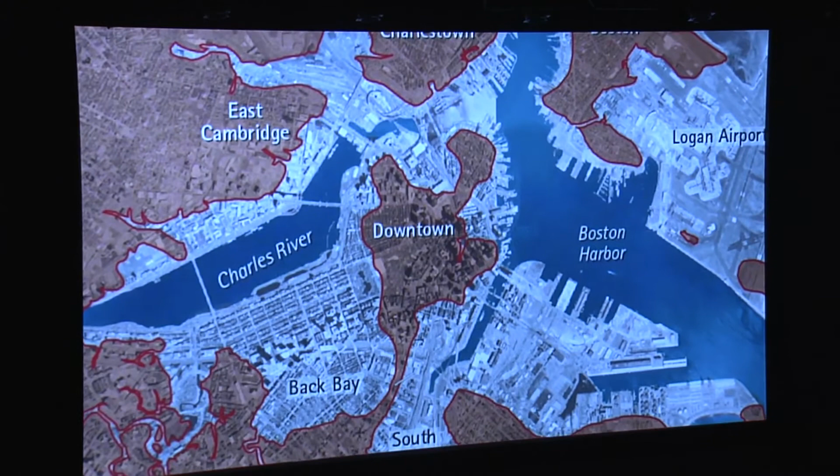The city of Boston, back in colonial times around 1630 to 1650, was basically a peninsula as it is today, but much smaller. Eventually it started to burst at the seams, and there was a need to create land. So they filled in Back Bay, Fenway, and South End over a period of about 30 years. They also filled in areas of the North End, the majority of East Boston, and Fort Point Channel. There were probably six major fillings that occurred that created what Boston is today.

After that, they had land to build on. In the period of the late 1800s to early 1900s, buildings on filled land were supported on wooden pilings. Not every building in Boston on wood piles has the tops of the piles at the same elevation, and at an elevation that is below groundwater.

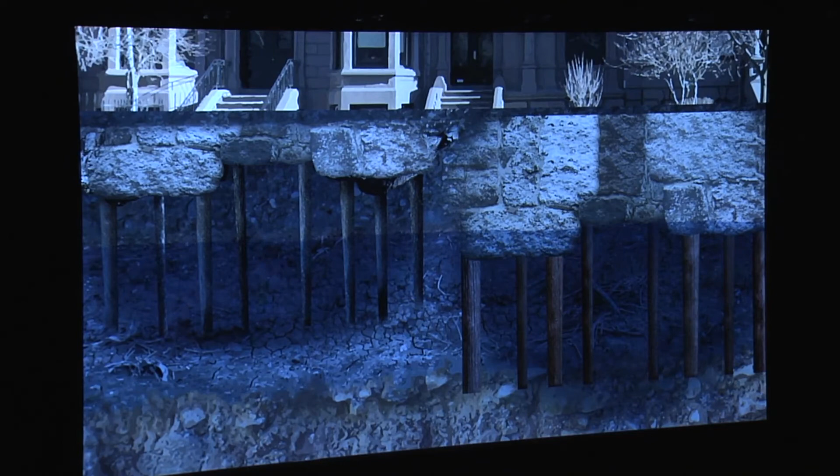As time has gone on and Boston has become more developed, there's been less ability to replenish the ground with groundwater because it's just a much more impervious boundary. As soon as the water table drops and stays down for a certain period of time, that wood becomes exposed to oxygen. The oxygen creates an environment for bacteria and bugs to grow, and when those bugs grow, they attack the wood and eat it, and that's how they survive.

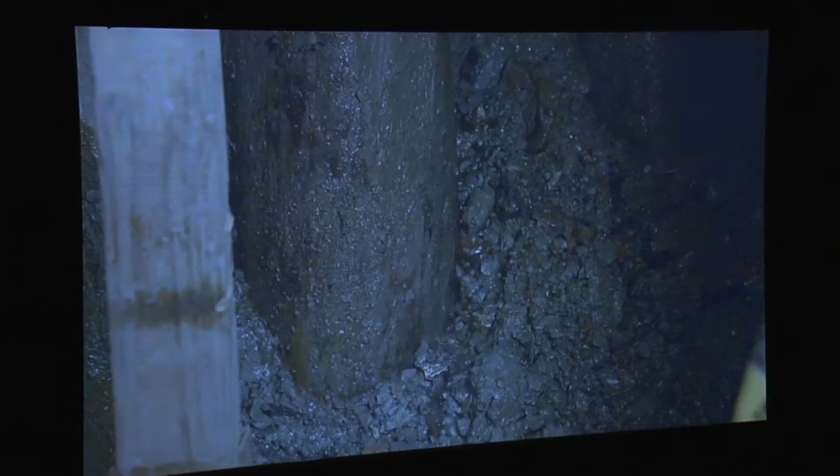So what happens is you go from, say, a tree or a wood pile that might be 10 or 12 inches in diameter, holding up granite blocks, which are then holding up brick walls, down to about 2 or 3 inches, or in some cases it completely deteriorates. The support of those blocks in the wall is lost, and the ground, which is filled land and wasn't good ground to begin with, causes the buildings to settle.

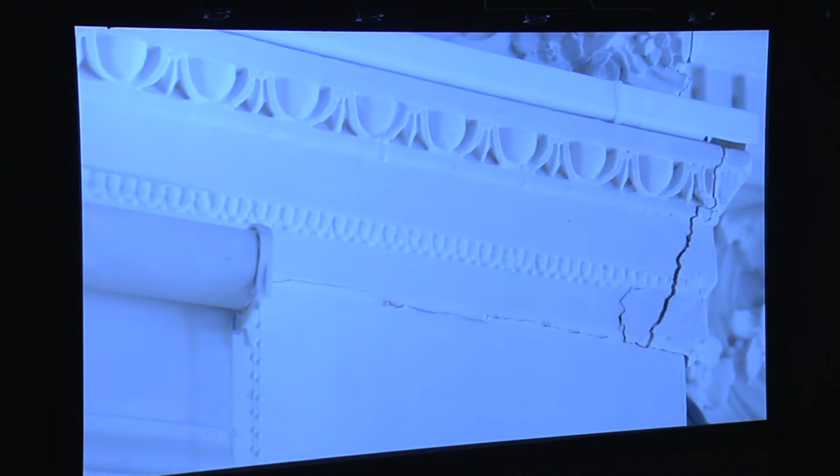What usually happens is none of the piles deteriorate at the same time, so you get different conditions at the front of a building versus the back. Instead of the building settling evenly, one part settles and the other doesn't. When that happens, the brick cracks, or your nicely finished walls crack, or you can't open doors and windows, or you just have problems with the house itself.

And so that's the problem, that's what we're trying to identify. And if we do identify it, then we try to repair that problem. The city, and ultimately the residents, look to us as a resource. We're the information guys, so to speak.

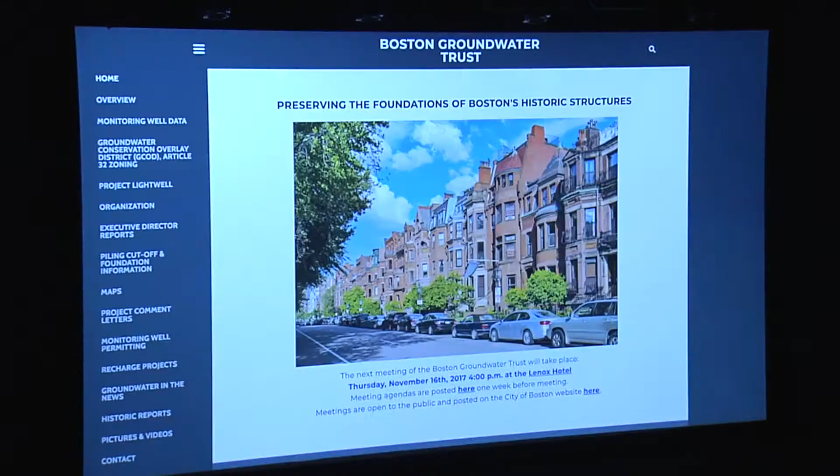People want to know where the groundwater levels are, foundation information, piling cutoff information. We have that. Our primary purpose is to record and report on the groundwater levels, make recommendations to solve the problems, and inform people, let the people know of this issue, why it's important to maintain groundwater levels, that these buildings are in fact on wood pilings, because the first thing you would think of a building is concrete or steel.

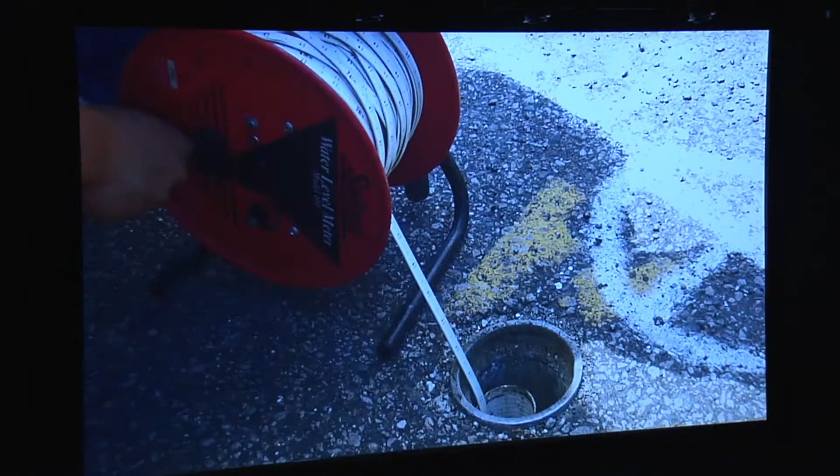We monitor groundwater levels through a series of groundwater observation wells that are in the public way. There are roughly 800 observation wells spread throughout all the areas of the city where there are wood piling supported structures. Every 5 to 6 weeks we read all 800 wells, starting in East Boston and finishing up in the southern portion of Back Bay. Once we finish there, we go right back to the beginning and start all over again. It's a process that usually happens about 7 to 8 times a year, reading the whole well network.

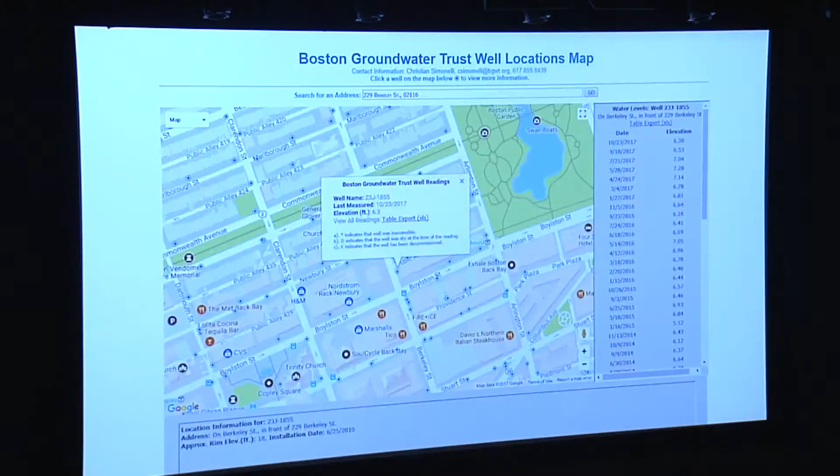If someone calls us to say, I have a building here, is it at risk, we look at our groundwater elevation data, we'll look at our pile cutoff elevation data, which gives us the height of the pilings, and then we'll make a recommendation off that, whether or not they should seek out additional assistance. Ultimately, at that point it would lead to contacting a geotechnical engineer or structural engineer to come out. They'll take a look at the building and give a more professional assessment and advise on what to do from there.

If the Groundwater Trust didn't exist and this well network wasn't established, you'd be putting thousands of buildings at risk.

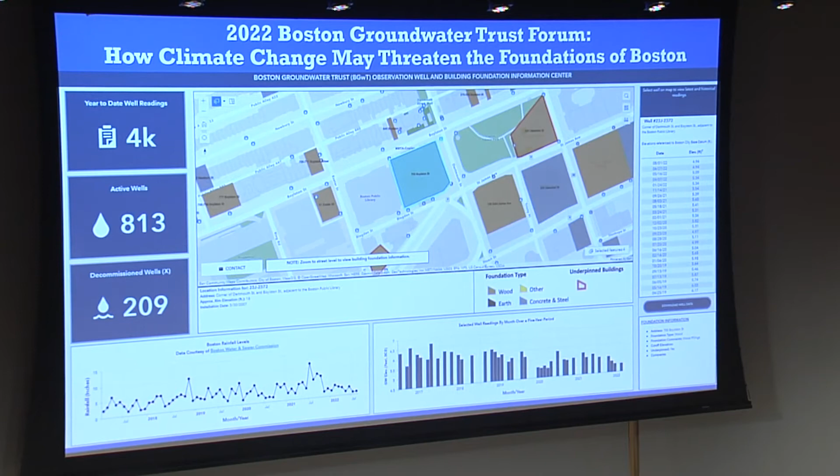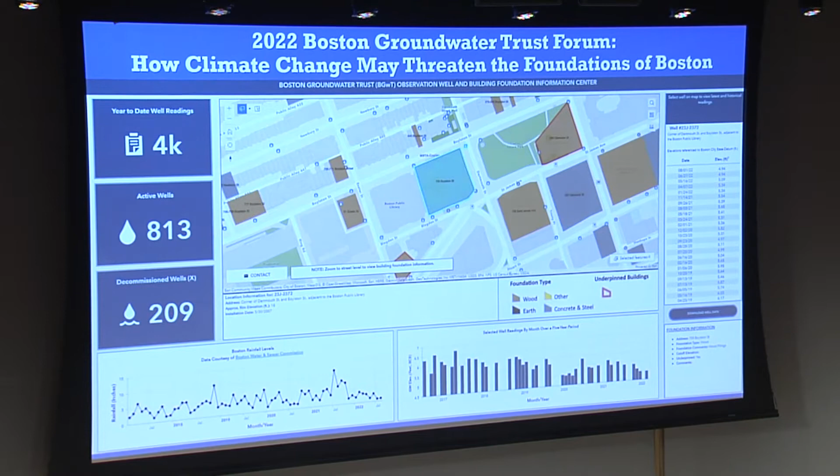We recently updated our website to not only include the observation well data that we have, but also include the building foundation data that we have in one place. We had them in 2 separate spots on the website, but now when a resident calls me or an engineer calls me, we walk through the map, and this is where the groundwater levels are in this particular area. This is what we have for building information, whether or not the building is in fact on wood, whether it's on concrete, whether it's even stated that it's on earth, whether or not it's been underpinned.

Obviously we're adding to this on a daily basis with the readings, and we try to get new data every week on the buildings as much as we can, not only scouring the building inspector reports and the original building permits, but also, anytime we have an engineering firm or a client that says, hey, we're taking a look at our foundation, would you like a copy of the test report? We say yes, and we put that information up on our website.

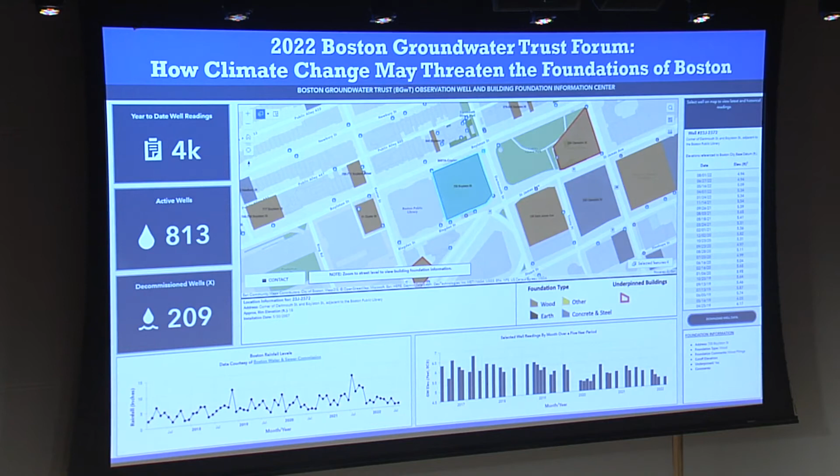Moving forward, we'd like to automate a bunch of observation wells with remote sensing devices. We currently have 5 units deployed that are working, taking continuous readings since March. They seem to be working pretty well. We'd like to keep them in place for about a year before deciding on purchasing additional units, but having these units in place would really allow us to learn about trouble spots sooner rather than manually going out and reading the wells, which we'll always do.

In between the 5 to 6 week period when we're not reading the wells, we can have devices in place that can tell us what's really happening. It's significant because we can tailor the time the water levels are measured, changing the frequency from every 5 minutes to every hour. If we know a significant rain event is coming, we can increase the frequency of readings and see the impact a particular rainfall event may have in a certain area.

The Groundwater Conservation Overlay District was mentioned off the top, and this is really the most significant progress, in my view, that's been made since the Groundwater Trust was reestablished in 1997. It was created in 2006, amended in 2007, and we recently modified and expanded it in 2021.

When you look at the map, the areas highlighted and outlined in red are areas now part of the G-COD that weren't before. Quite simply, they weren't part of the G-COD before because we didn't know anything about the water levels or the buildings in the area. Fast forward 15 years later, we've acquired all this information and felt it was appropriate to include those areas. The largest area at the top of that map is East Boston.

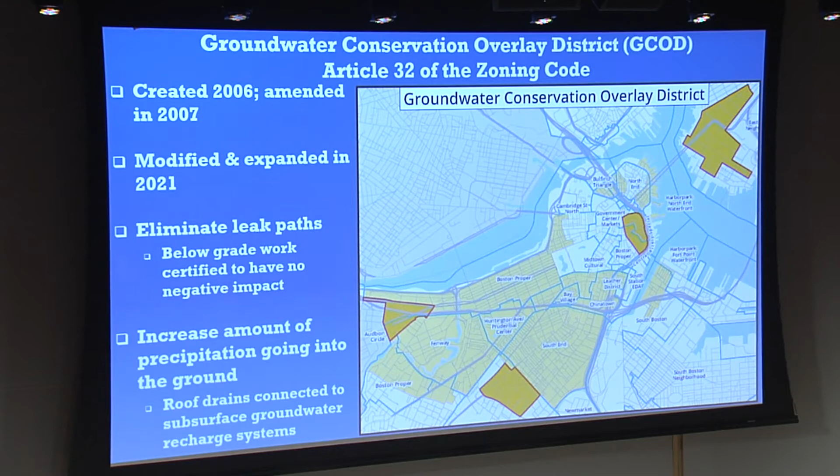Somebody doing something that, elsewhere, you'd pump water to keep a basement dry - here, it's absolutely the worst thing you can do. We also want to increase the amount of water going into the ground. So take those roof drains, instead of having them go into the storm system, redirect them into an engineered recharge system under the ground - basically putting your roof drains into an engineered, structured dry well beneath or adjacent to the building.

The City-State Groundwater Working Group - this is where really all the work is done, and where the positive impact on groundwater levels really shines through. This was signed in 2005, a memorandum of understanding by us, the city, and all these city and state agencies. It was a commitment for all of us to meet every quarter, share information, for us to stand up and say where the water levels are low and where the problem areas are, and for this group to go out, inspect the infrastructure, and if it was found deficient or leaking, repair it. I'll actually show you an example of one of those repairs.

Hopefully we have the potential to expand the mission of this group to also explore solutions for green infrastructure. Maybe this can be a group that can look at wide-scale, significant pilot projects for green infrastructure to really help our mission and the city's mission on more GSI.

So when we talk about underground infrastructure, this is what we mean - sewers, manholes, tunnels. All this stuff is great, provides a service to the buildings and building owners, but what happens if it leaks? What happens if there's a crack? What happens if it settles?

On our website, we have a groundwater underground infrastructure tab that details specific areas where we had depressed groundwater levels, and through our upgraded map this summer, we were actually able to access ArcGIS story maps.

When you click on that image on Dartmouth Street, for example, it'll take you to a new window and open an environment with a series of maps and graphs and a narrative that says, here's where the groundwater levels were, here's where we found the leak, and this is what happened when the leak was fixed.

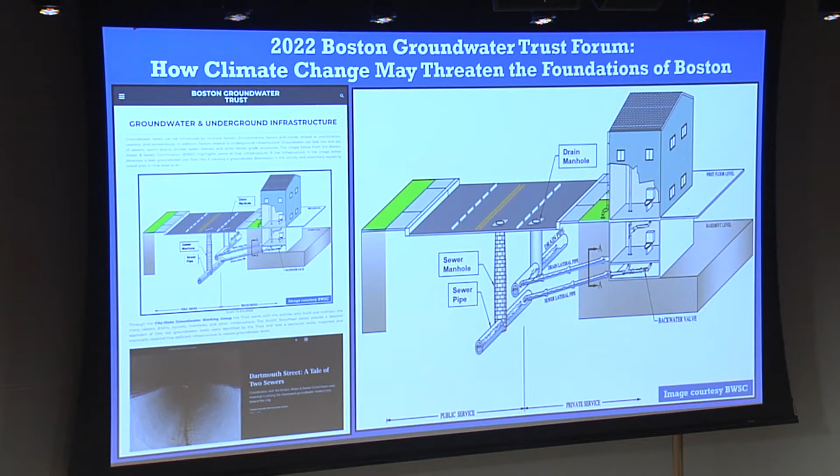So we said to Water and Sewer, hey, what do you have in the area? And John Sullivan said, leave me alone. Then he said, give me a week. So his team went out, took a look, and performed what we call dye tests.

Basically, they opened one of our wells, put in some green dye, and checked if it showed up in their sewer. Sure enough, they had a sewer right at elevation 3, where that groundwater level was, that was leaking. Water was coming in. They designed a repair solution, and the result was a spike.

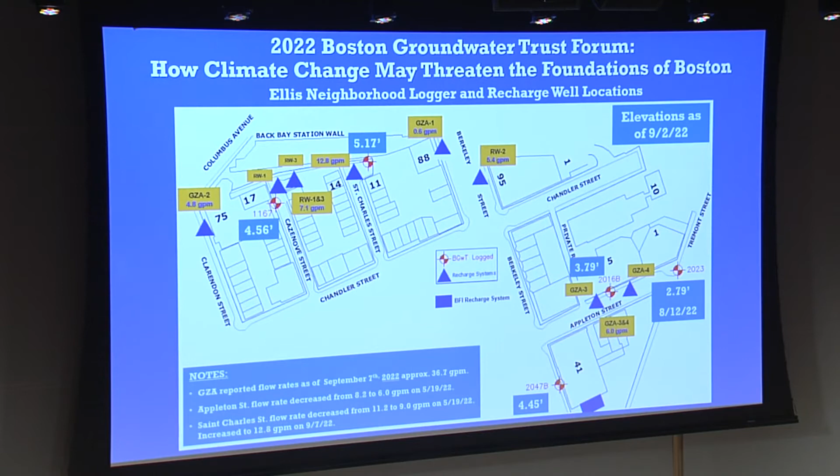If we turn off all these recharge wells, the water level would drop. The depressed groundwater levels in this area are really a result of the construction of the Southwest Corridor combined with some other factors. Needless to say, it's an extremely difficult, expensive fix, and complicated to get to that spot to repair. So this was a solution the City-State Groundwater Working Group came up with, and the MBTA is the one that ultimately funds the water for these wells on an annual basis.

What we've seen in our data loggers in these two wells specifically is the water level drop and then stay down because we're not getting rain. These systems were designed to have around 40 to 45 inches of precipitation a year. When we're not getting that, these systems need to be turned up, because all the way up to this year, they're falling below the threshold of 5, which is where most of the piling cutoffs are. So we have to pump up the water in those wells, unfortunately, until we get some precipitation, and then we can turn them back.

Initially, the systems were designed to run around 40 gallons a minute or so. They were as high as 54 gallons a minute, but over the years we've really tried to fine-tune and tweak them to use the least amount of water possible to keep the water levels up in this area. Unfortunately, during times like this, we need to increase the flow.

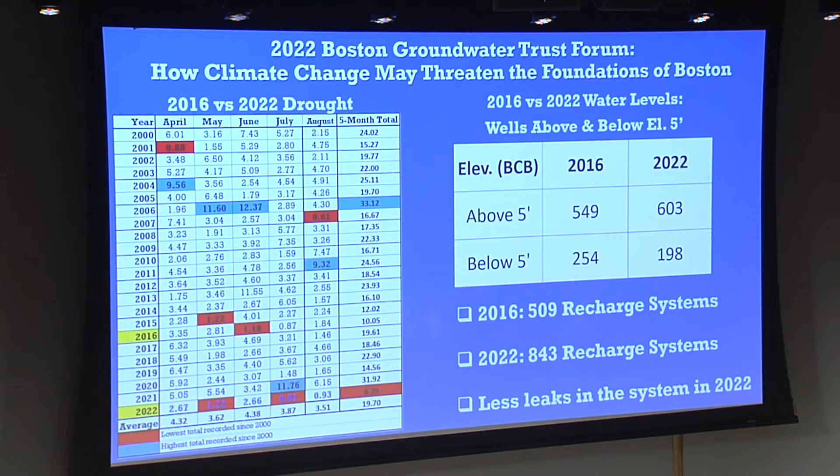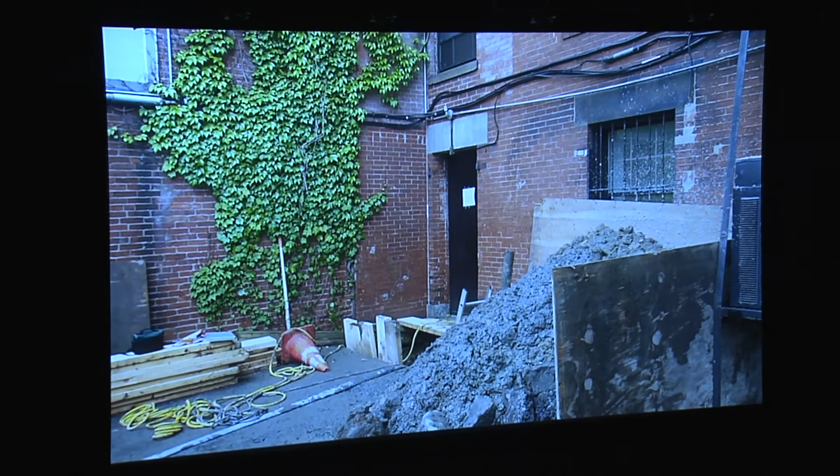Here's what we're hoping to avoid — this is the process of underpinning a building. In the normal course of finding out there's a problem to the point where you actually start the work, it can often be a few months. Unfortunately, what it takes more often than not to figure out if there's a problem is digging what's called an exploratory test pit — you physically excavate to go down and look at the wood piles. Once you've seen a pile that's deteriorated, and more importantly that the water table is below it, you're not going to be able to bring that water table up likely, and therefore you should do a repair.

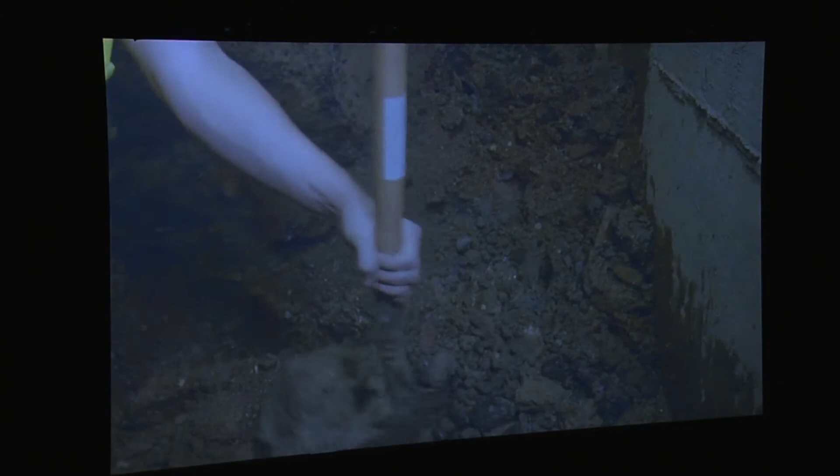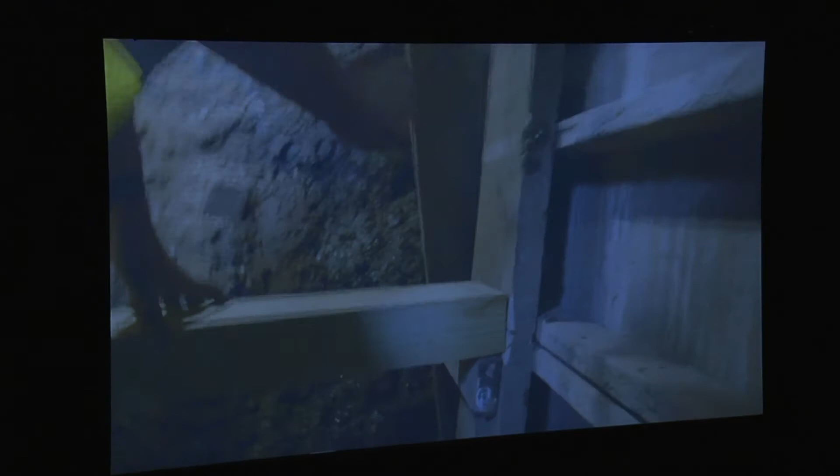Pit underpinning is a series of small excavations similar to those exploratory excavations that allow you to go down and expose the wood piles. It's all dug by hand, so you have a series of 5 or 6 guys digging a hole, bracing it as you go deeper with timbers so people can get inside and do the work as you get deeper.

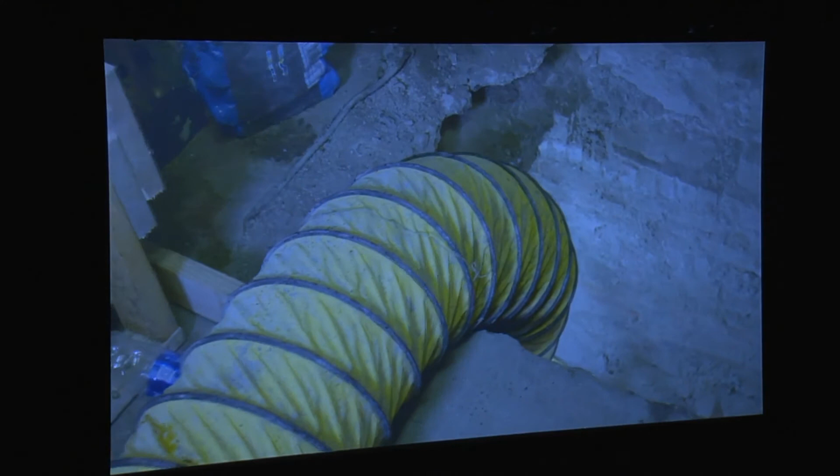You've got pumps that have to pump groundwater because we have to go below the groundwater table to get to an elevation where we can cut the piles. Instead of just exposing them, we have to go down below the granite blocks they're supporting and get in underneath the wall to expose every pile beneath it. When we go in and cut these rotted wood piles, it's usually just the top 1 or 2 feet that's rotted, but we're cutting 4 or 5 feet because that ties back to getting to an elevation that's a few feet below normal groundwater levels, and at least at or slightly lower than the deepest utility.

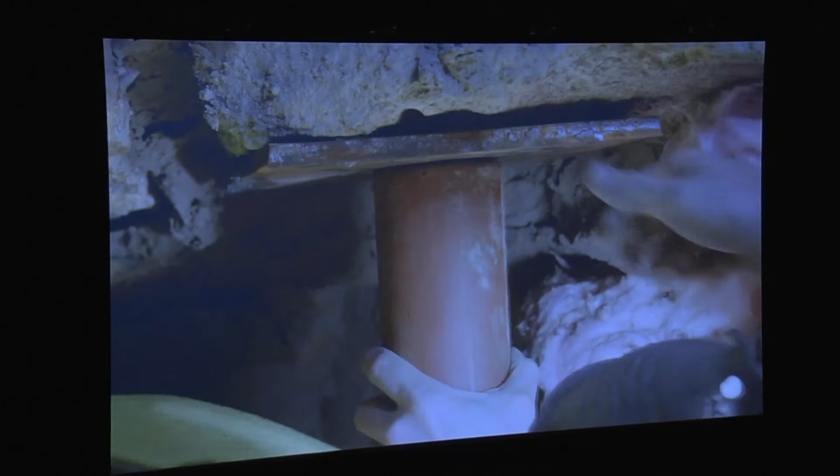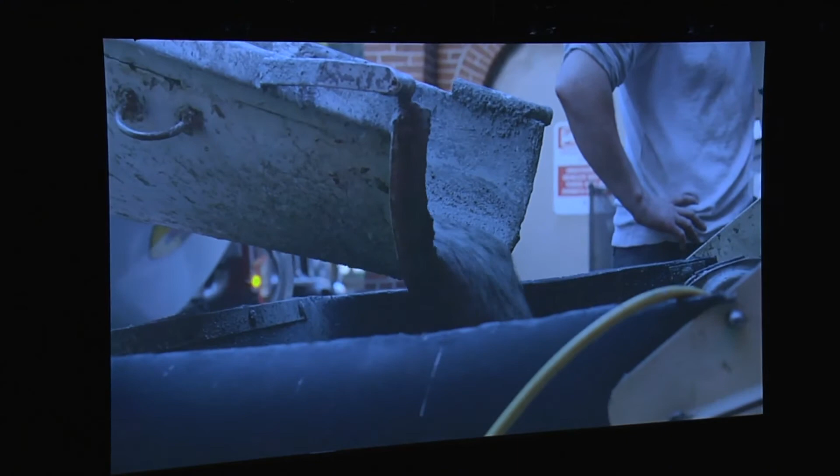Each pile, as you're cutting it one by one, you're replacing that section you removed of wood with a steel post, and it comes back up to the granite block. So at the end of cutting out a series of 7 or 8 piles, you have a series of these posts. And once you've posted those piles up, what you then do is put a form up.

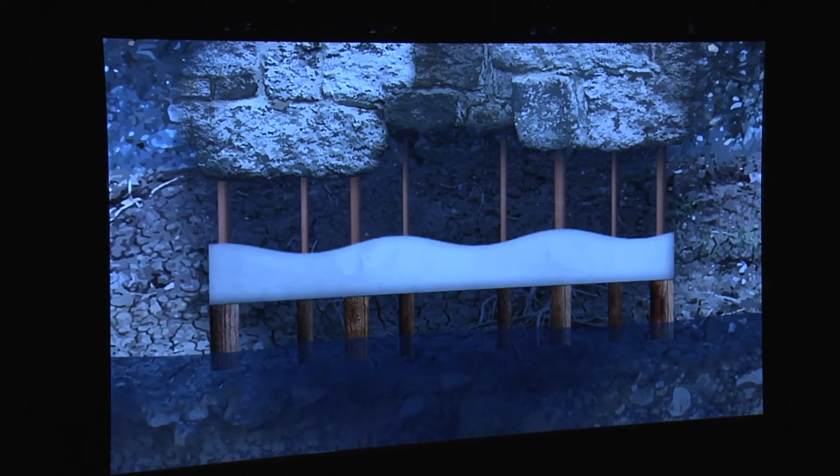And then encase everything in concrete. And then once you turn off your pumps where you're dewatering to make all this work happen, the water table will rise back up and it'll be above the wood piles, and you'll have some insurance in the future that you've now got a wood pile 2 or 3 feet below the groundwater table.

So after you've done that all in one pit that might be 8 feet long along your wall, you'll come out of that pit and move to an adjacent pit next to it. It's a series of pits working yourself all around the building and at interior columns or walls, one by one. Eventually you have a whole new foundation that's dropped the wood piles below the groundwater table.

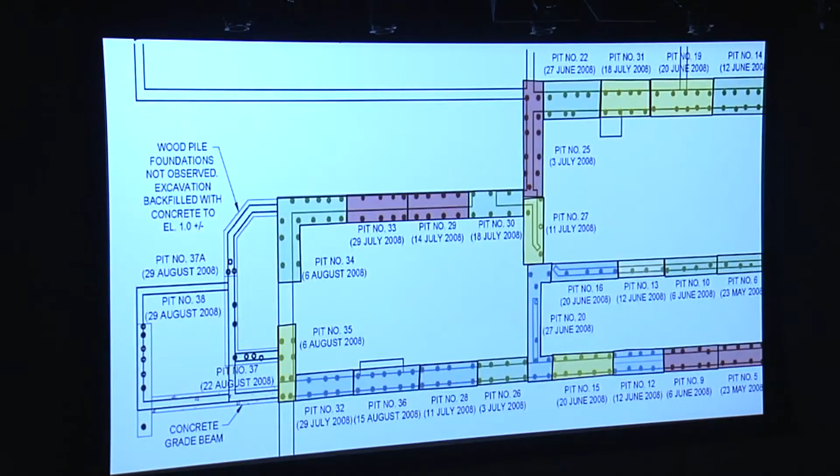Once they do all that for those 8 piles, you do it all over again the next week. So if a building has 400 piles underneath it and you're doing 8 piles at a time, doing a pit a week, that's where the months-long process comes in.

You usually find that the cost to repair the piles beneath that building might be around $250,000. It can fluctuate up or down depending on a lot of things, much of which is what you, the owner, will allow the contractor to have for access to the building. It can be a much more costly process when you are forced to still live in and access that lower level of the building.

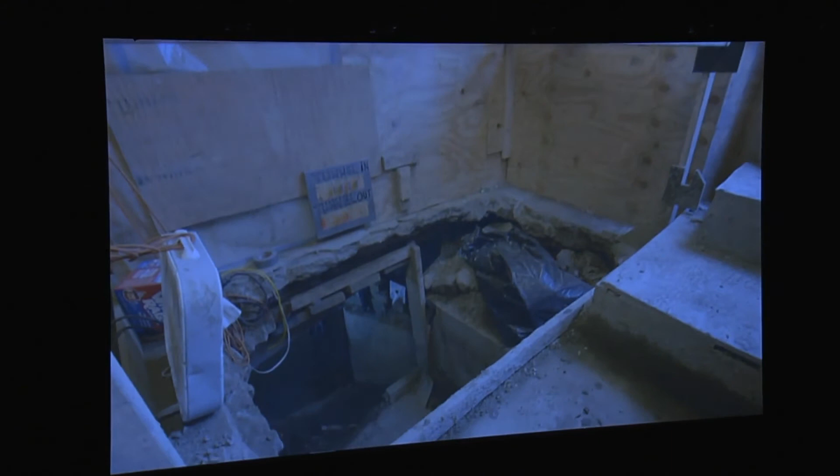It's never rewarding to find out that a building's being underpinned. What's rewarding for us is that for the homeowner, if they go to sell the building, they can say our piles are fine, we had them fixed, this building's on a whole brand new foundation.

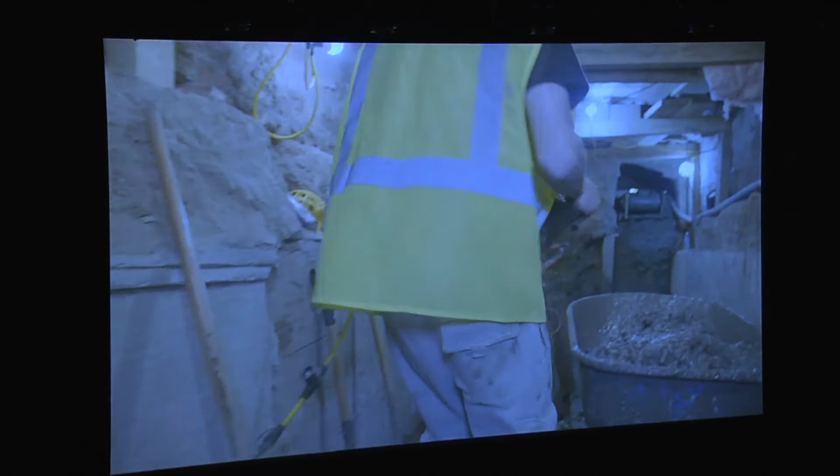But I'd like to think that Boston now is ahead of the curve, so to speak, and more proactive in identifying problems and helping people identify problems, and not allowing things to get to a situation where it could become a problem. We want to show people this is unpleasant, this is expensive.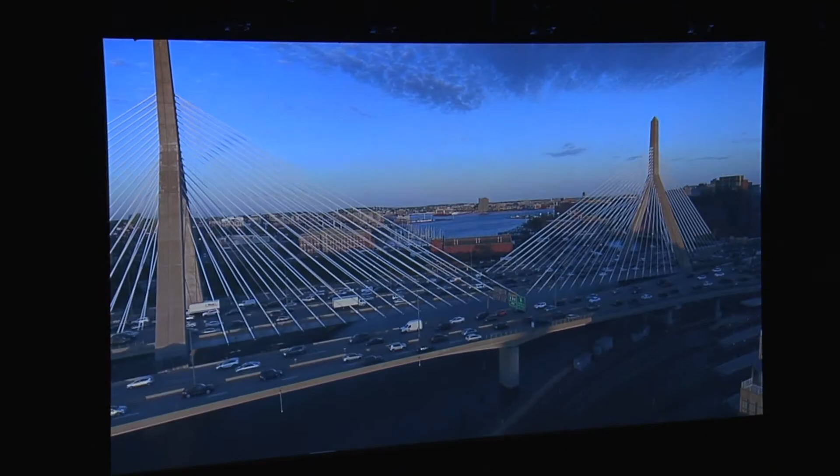If we weren't monitoring groundwater levels, this would be done on a much larger scale, much more frequently, and it wouldn't just be this one spot on this street, it would be multiple streets in multiple neighborhoods. We can't control what happened 130, 140 years ago, but we can control what's happening now. So that's why we do what we do, to prevent that from happening on a massive scale.

So where else is this happening? That's usually the first question I get from a lot of people. Is anybody else dealing with this stuff? Europe is, particularly Amsterdam. And we have a speaker virtually joining us tonight from Amsterdam, named Wilco Koning, K-O-N-I-N-G, who's going to walk us through how Amsterdam is tackling this issue.

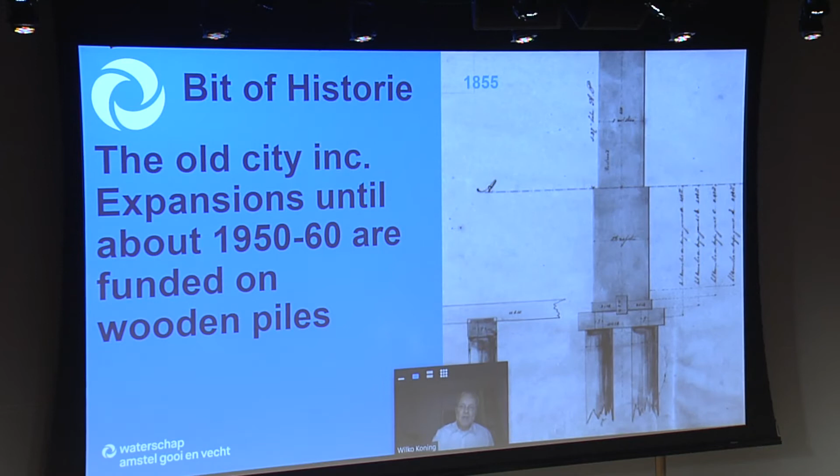We are also familiar with problems with foundations in Amsterdam. I have a few examples from the past where the foundations were not all too well, especially because of differences in groundwater tables.

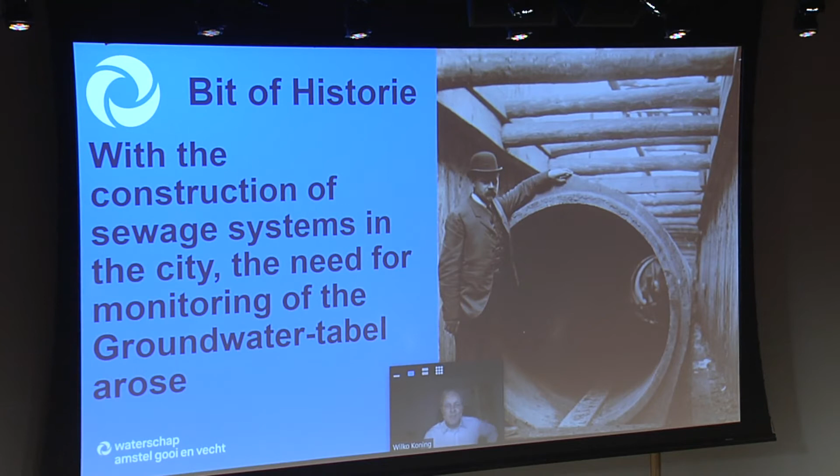Especially when we started construction with sewage systems, around 1913 with the first sewage system in the city, we found out quite fast that we need monitoring of the groundwater table to keep an eye on leakage within the sewage system. In particular, the sewage pipe could cause problems with lowering groundwater table, and the effects you can see in a few of the pictures I have.

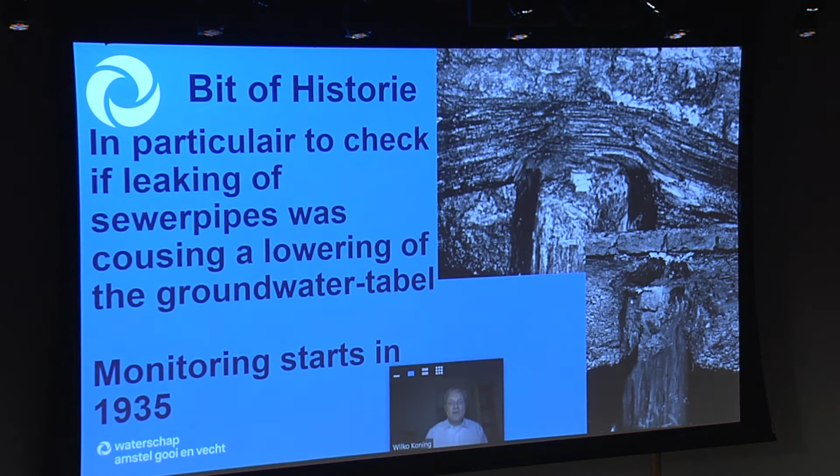We started monitoring the groundwater table in 1935. At the moment, we have a total number of monitoring points, or observation wells as you call them, of 4,296 points.

Of these, about 3,400 are monitored by hand about 6 times a year, and almost 900 are automated with loggers. The automated ones differ — some measure every day, some every hour. Most actually measure every day because we have so many points; otherwise it's a lot of data.

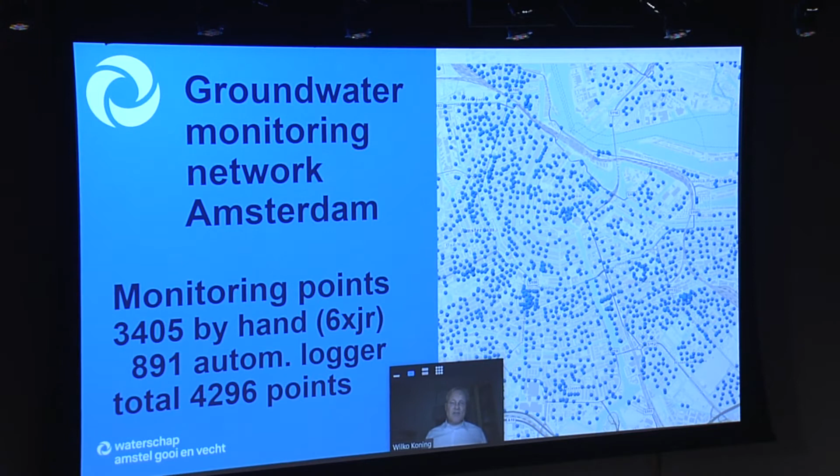I was asked to tell a little bit about climate change as well. Here's a picture of the city of Amsterdam.

If you talk about Amsterdam, the precipitation is actually going up. There's more rain falling — looking back from 1900 till now, from 768 millimeters a year to nowadays around 930.

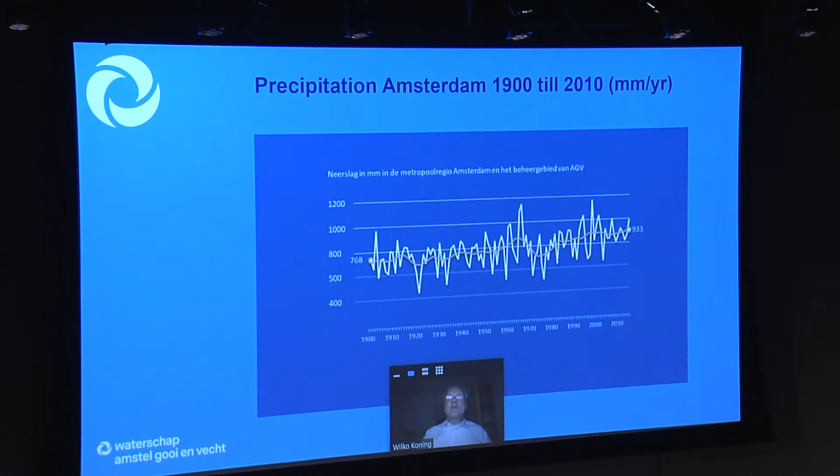The number of days with heavy rainfall also increased, from about 20 days to 24 days a year. This tells us there's more rain falling, but a lot of it is falling in a shorter amount of time — so precipitation is coming more in gales, with heavier rain in a shorter amount of time.

What's also happening is we have a lot more summer days, warmer periods between the gales, and especially in those warmer periods you get very hefty rainfall. The problem is that only a small amount of that hefty rainfall actually reaches the groundwater table. So with warmer temperatures, more evaporation, and rainfall in shorter, heavier bursts, you actually get less water reaching the groundwater table.

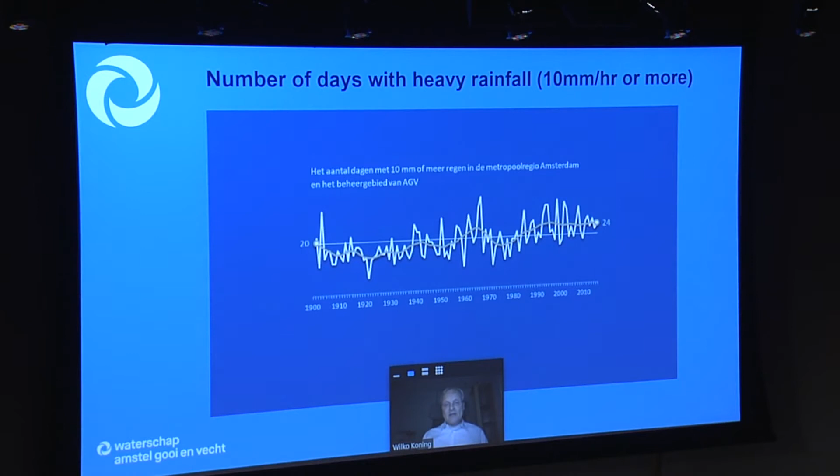That means that in the winter period you get wet cellars, and with a high groundwater table even the roots of trees can start rotting. In summertime we have a low groundwater table with exposed wooden piles, which can cause damage to the wood piles, as already shown.

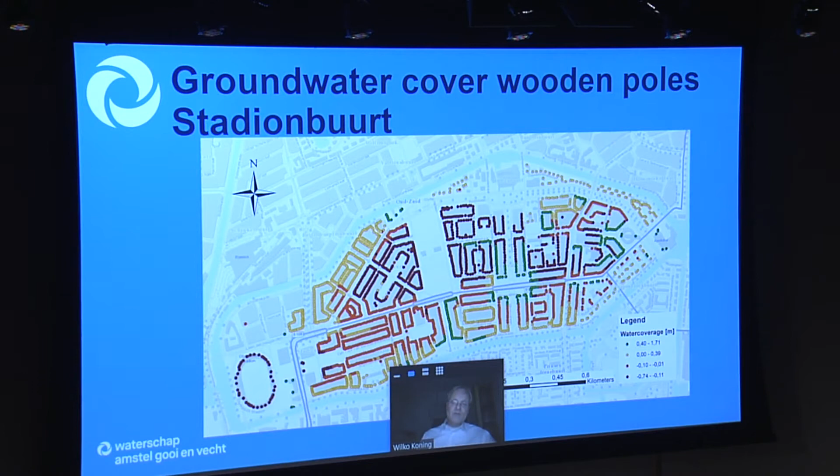We have made a model which is validated against actual monitoring of the wells, the precipitation and the evaporation. If we take a climate scenario for Amsterdam for 2050, we can see that with only a few inches lower groundwater table, the time and number of times of exposure is exponentially bigger, almost twice as much exposure to the foundation, with only a few inches difference.

In this case it's only about 2 or 3 inches lower groundwater table, with the change in climate we expect to see around 2050. So the wood piles are actually in quite a bit of danger.

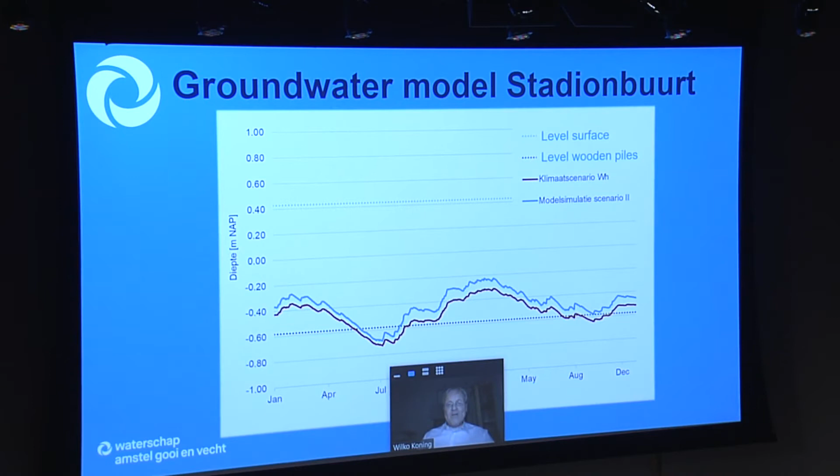That means that if you talk about the risk for the wooden piles, a repair in Amsterdam or in the Netherlands costs between 40,000 and 100,000 euros per house. The Netherlands has about 750,000 houses at risk, so you're talking about 40 billion euros. For just Amsterdam, you're talking about around 200,000 houses, which would mean about 10.7 billion euros — and I'm not even looking at municipal buildings, which are excluded.

And if you talk about the canals in Amsterdam, which we're famous for, you also have the quays next to the canals, which are also founded on wooden piles.

The house owner is responsible for the groundwater table on his own premises, and also for the quality of his foundation. It has to be good enough for normal activities like sewage replacement, working on mains, working in the street, or when the neighbor works on his house. It all has to be possible. You have to have a good enough foundation for that, and the cost of repair and replacement of foundation is the house owner's responsibility as well.

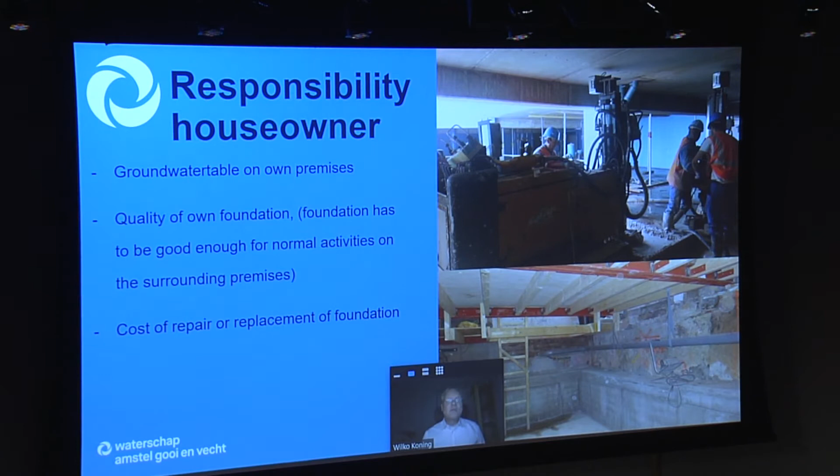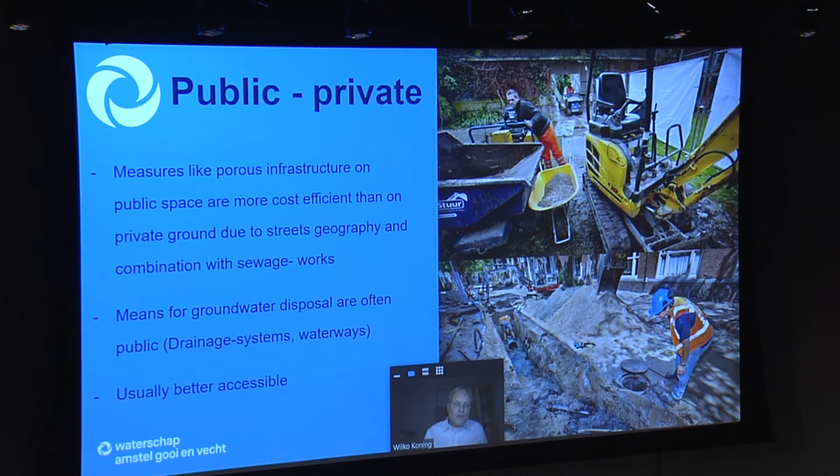But it's actually easier for the municipality to take measures. On the top picture, you see how we work in this case on private ground, with very small bad access. Below is in the public street, where you have enough space and it's easier to work. Especially linear infrastructure, the streets that you have as public property, are very well suited to take measures and more cost-effective. That's why in Amsterdam we take measures on public ground for groundwater, to keep the groundwater table at bay. The means for groundwater disposal are also often public, like drainage systems or waterways, especially in Amsterdam.

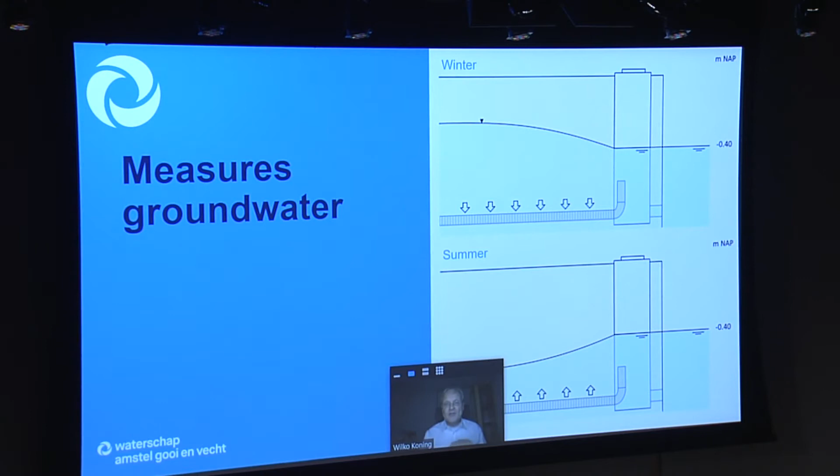What we try to do is, especially in winter, drain the water if there's an excess, and in summer we try to replenish it, in order to keep a stable groundwater table. One of the measures we use is DIT drainage.

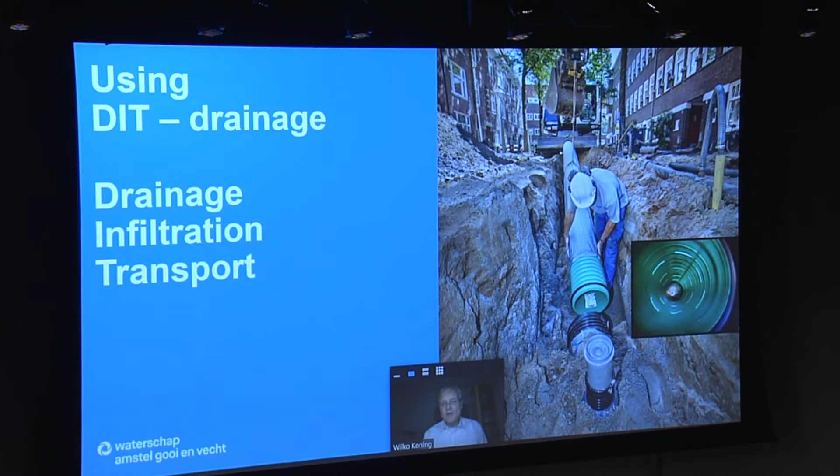DIT stands for drainage, infiltration, and transportation. The pipes are used to transport the water to where it's needed, in order to infiltrate it into the groundwater table, or just to drain it and take it away if the groundwater table is too high. You can steer it with valves, or just connect it to the surface water.

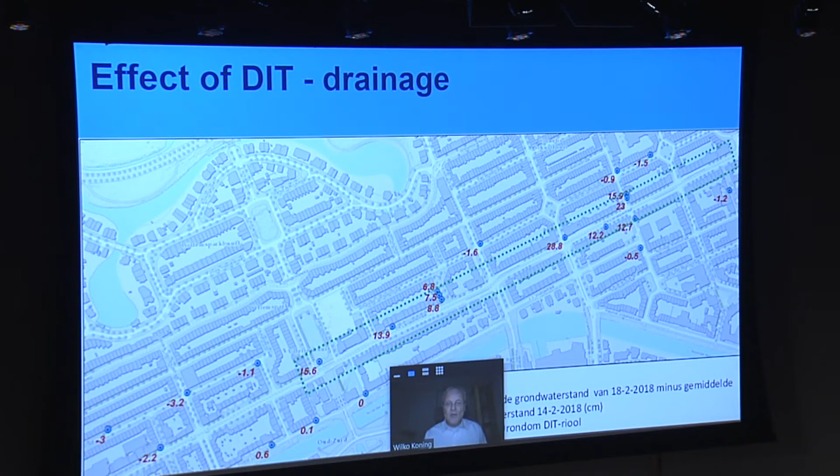The effect of this drain is that in one street, within the green square you see there, there's about a 30 centimeter, or 12-inch, difference in elevation of the groundwater table, which is just enough to keep the wooden piles wet and below the groundwater level.

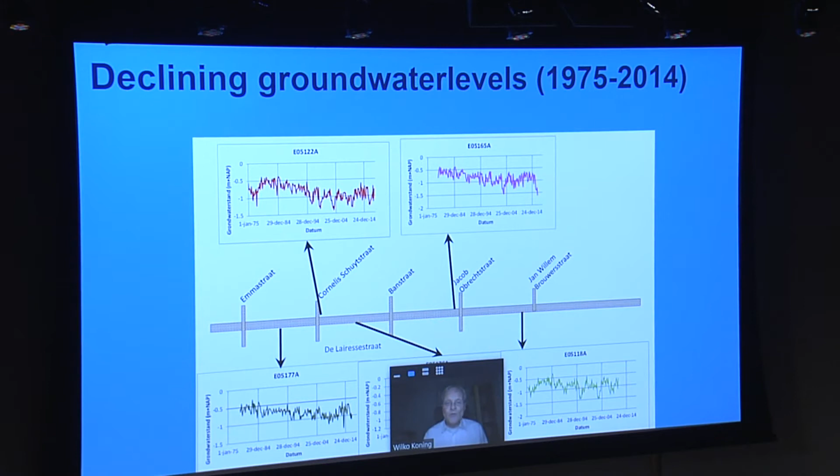On this slide, you can see the groundwater table since '75 to about 2014 going down over time. There was some leakage from the sewage, which we repaired, so you see it going back a little, but not to the former level. This meant the wooden piles were still getting above the groundwater table.

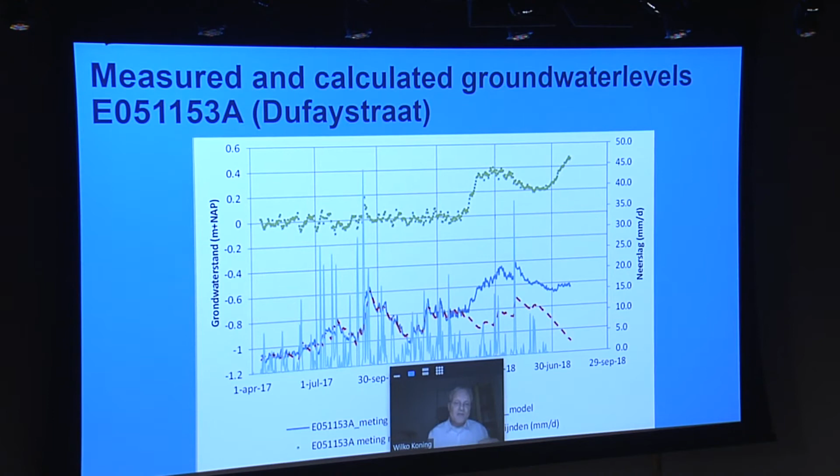What we also use is dry ditches or bioswales, for storage of heavy rainfall but also for replenishing groundwater. We use two types. One type only activates when the water in the streets rises, so only with heavy rainfall, with the first rain going to the drainage or sewage system, which takes most of the dirt and filth from the streets. We also have a system where all the rain goes into the ditch, especially when we need to elevate the groundwater table, taking all the rain that is available.

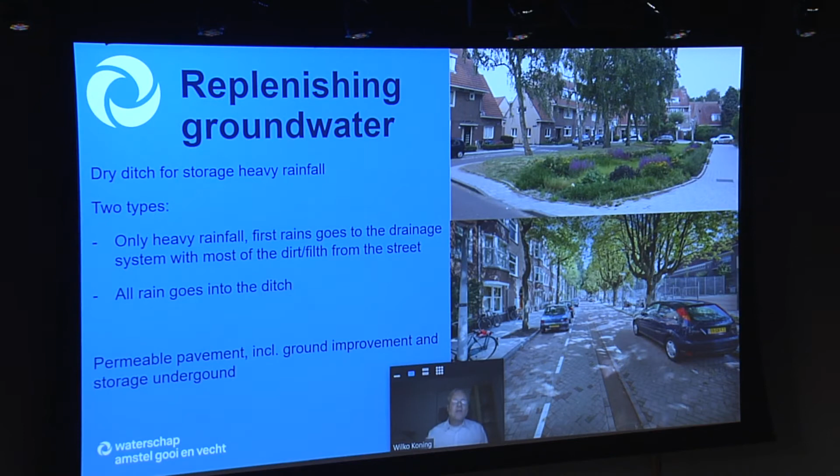We also have some tests with permeable pavement, including ground improvement and storage underground. We use the free volume between the grains for storage underground, usually using granular material.

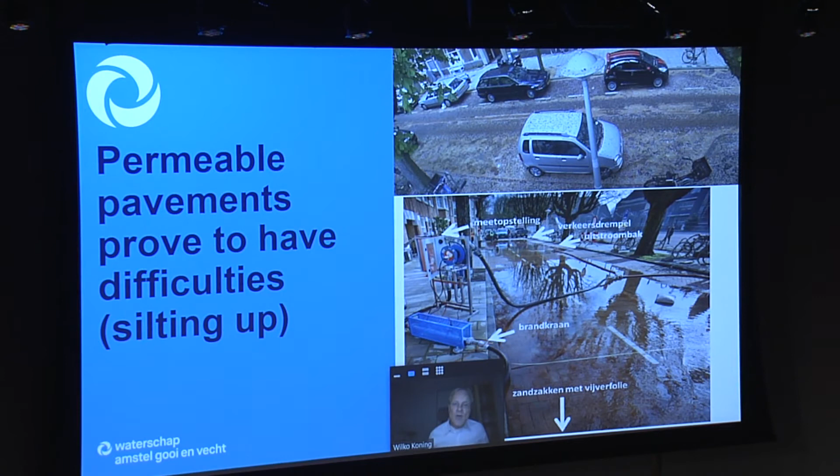For the permeable streets within the city of Amsterdam, we have the policy that we try to get the first 20 millimeters, about 0.78 inch, into the drainage system. The next volume of 20 millimeters, we try to keep between the curbs or on the streets. The last part of the volume, we try to get into bioswales, dry ditches, or surface water. But if we need to replenish the groundwater, the first bit of water that falls we also try to get to bioswales or infiltration in order to replenish the groundwater table.

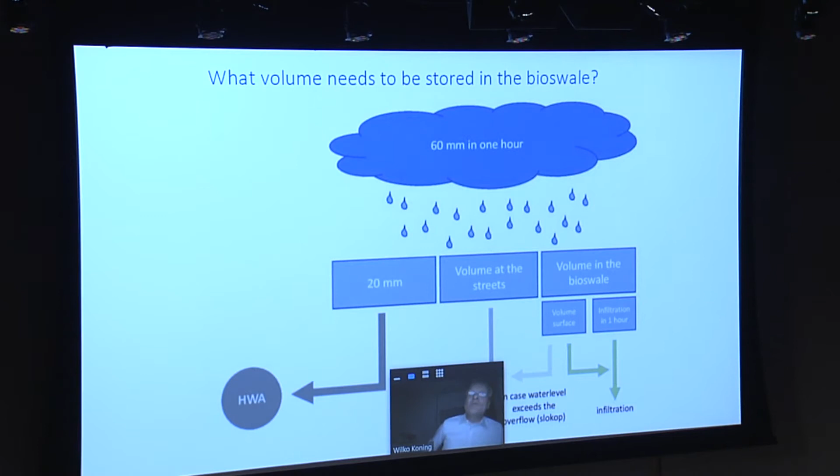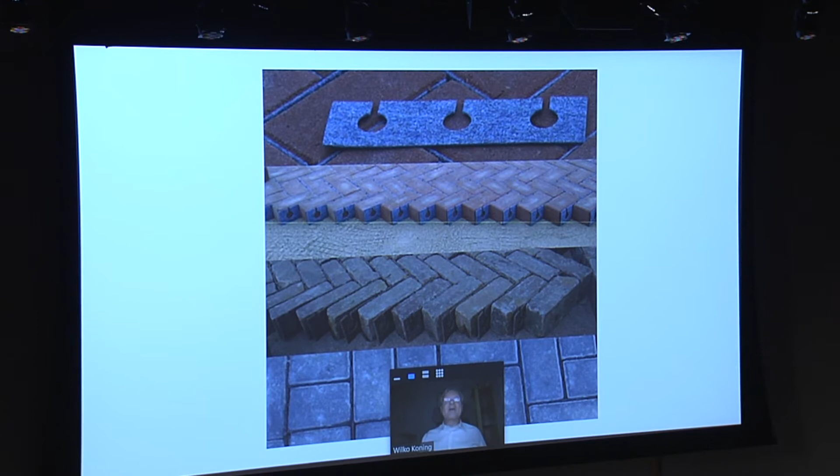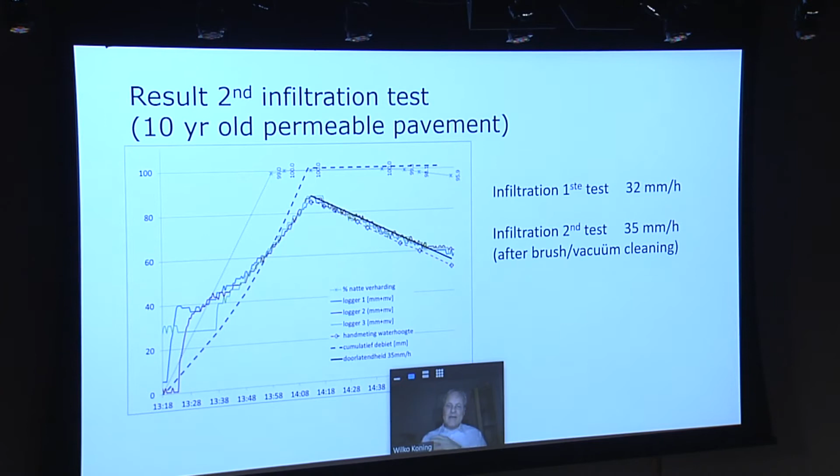We tested that as well, and we had a 10-year-old permeable pavement with felt. The first infiltration test was 32 millimeters an hour, and we made a second infiltration test, and it was 35 millimeters an hour after brush vacuum cleaning. So after good cleaning, it was a little bit better.

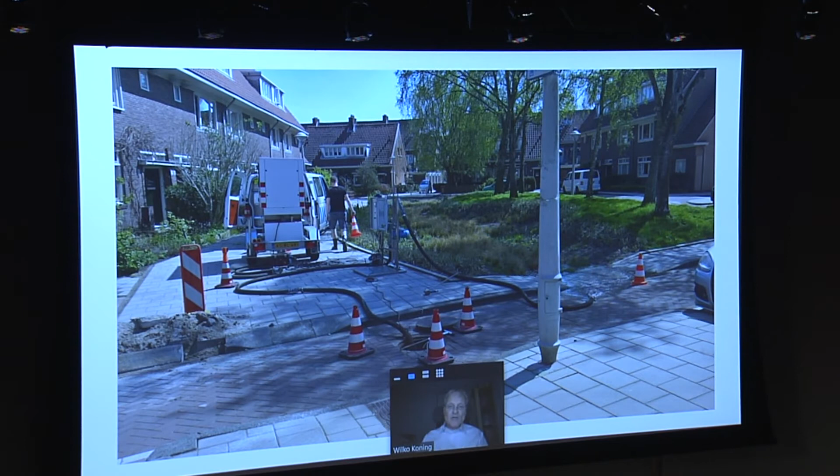We also made a full-scale test of a bioswale, as you see over here. We tested it, and the infiltration capacity of the bioswale was actually much higher, at 200 millimeters an hour. So it's much higher, and especially in dry periods, the infiltration of these bioswales is very much higher.

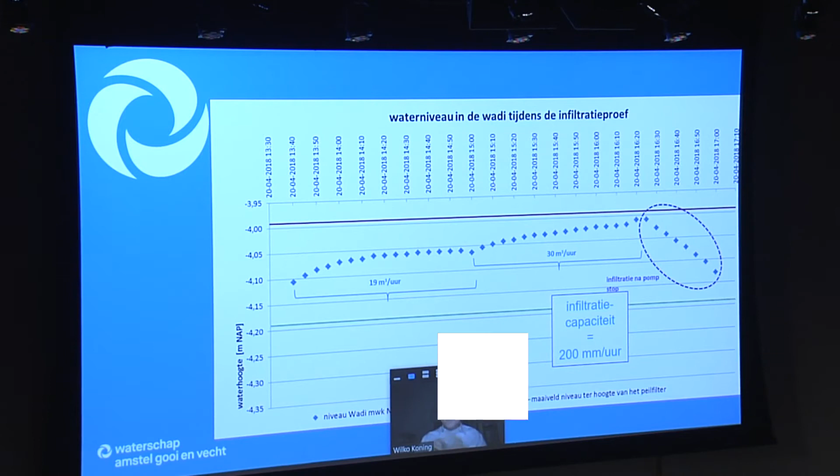We think that it's because with high grass and bushes, you have much more space for rainworms, beetles, and other insects to get a chance to open up the soil, which performs for infiltration much better than, for instance, short-cut grass or permeable pavements.

What we also tested is for trees. We measured the transpiration of trees, and we found out that if you take the recharge of the groundwater, the difference between the water going to the groundwater and the evaporated water, especially with elms, we measured that up to 60% of the recharge was actually used by trees. So trees use a big part of the groundwater, especially in summer. They have a big effect on the groundwater as well.

It was also talking about the heat island effect that you have with these cities. In cities it's normal, much warmer than outside of the city. Trees are very important for a cooling effect for cities, especially through the evaporation of groundwater through leaves. They need the groundwater for that, and of course the shade that leaves provide.

So we actually measured the amount of water that trees use, and a tree can use between 60 liters a day and more than 300 or 400 liters a day, depending on how big the tree is. So it's also important to have a good groundwater level in order to keep your trees healthy and to keep them with enough leaves to provide a bit of cooling effect in the summer as well.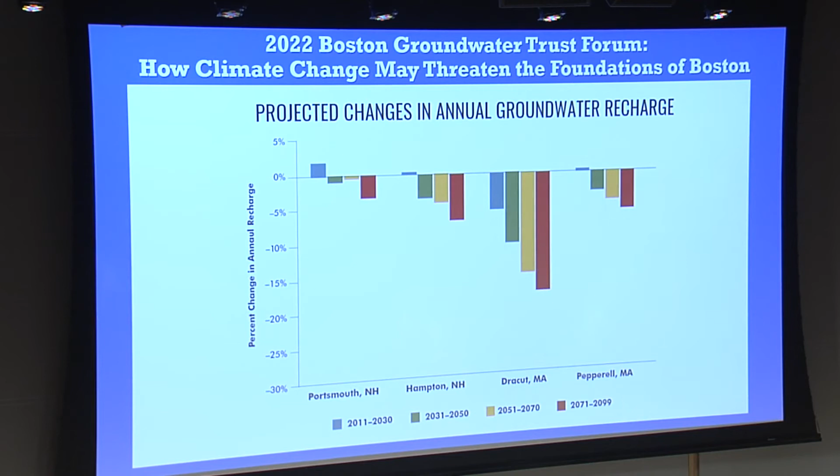In the report we looked at groundwater recharge, but we also looked at another effect of climate change on groundwater levels: the effect of sea level rise on groundwater levels. This is a study I worked on in New Hampshire with the University of New Hampshire, looking at coastal New Hampshire and how sea level rise will affect groundwater levels.

We're calling the area of groundwater rise the groundwater rise zone. In coastal New Hampshire, projections were that this zone would extend inland about 5 kilometers or 3 miles, much further than surface water flooding. What I'm talking about is rising groundwater levels underground—it doesn't mean the groundwater is flooding that area, just that it's rising. And groundwater rise won't be any more than the sea level rise itself; if you're getting 2 feet of sea level rise, you'll only see 2 feet of groundwater rise right next to the coast.

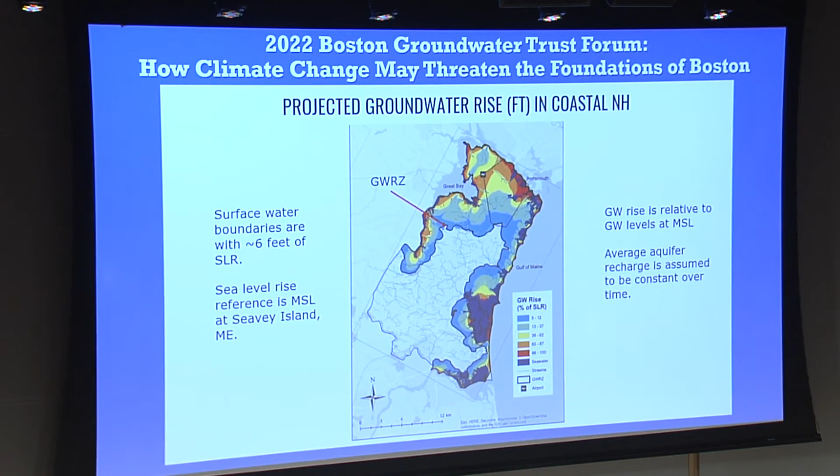Basically what you can see here is that groundwater rise is something that needs to be considered when thinking about climate change and groundwater levels. The study we did looked specifically at sea level rise affecting groundwater levels; we did not look at changing recharge, so recharge in our modeling was held constant. The next step in this work is really to look at the effect of both, and you can do that with a groundwater model. That's it. Thank you.

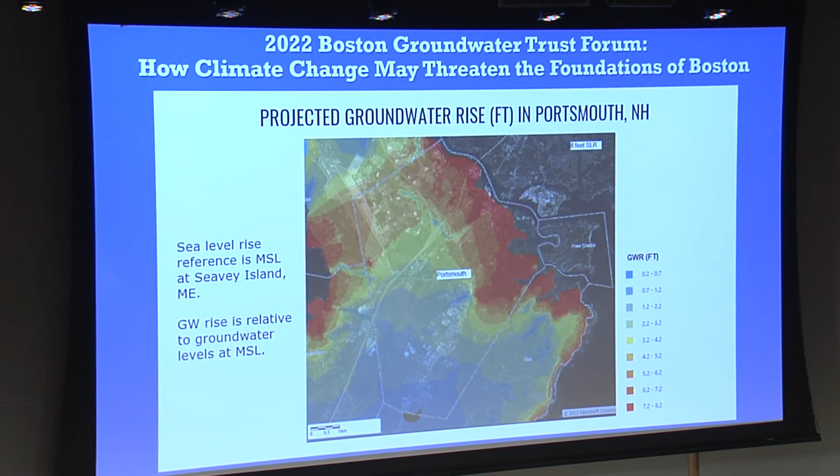Thank you, Rob. I will keep my presentation brief because I really want to get into some of the Q&A. I know my colleagues up here do as well, and I've seen David Leonard throw people out of the library at closing time, and I do not want to see that happen. Great to be with all of you.

Before I begin, I wanted to acknowledge two of my colleagues, Don Sylvia and Rick Smith, who are with me from Vicinity, who've been working incredibly closely and hard and well with Christian and his team on a really innovative plan on what we're talking about. So I'm going to give you the brief overview. As mentioned, I am Vicinity Energy's first ever Chief Sustainability Officer.

What's drawn me to this organization is that it's old, established technology that is constantly innovating to meet this moment. And that's what we have to do, and that is not dissimilar to what the Groundwater Trust is doing each and every day, taking advantage of some old tried and true technology, but working constantly to update their processes and making sure that it continues to thrive.

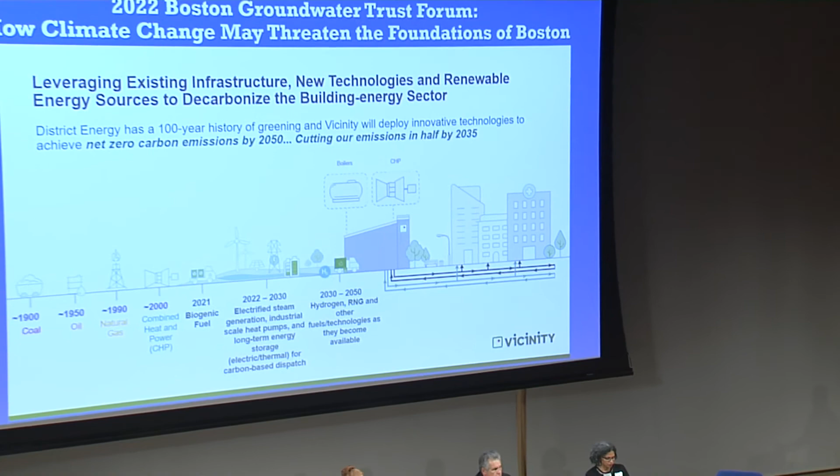So very briefly, what is District Energy? It's our steam system. We have a major plant in Kendall Square in Cambridge. We serve about 70 million square feet of property in Boston and Cambridge, mostly the downtown core, mostly the GCOD overlay district, which I'll get to in a second. And it's very old technology. Its origins go back to the Roman aqueducts, and we've seen it used in great success here in Boston.

The thing that I appreciate about District Energy is that it's fuel agnostic. 120 years ago, they used coal, then oil, then gas. And now we are embarking on our decarbonization efforts, beginning in Boston and Cambridge. We have ordered our first electric boiler. We are decommissioning a giant gas boiler the size of this room this month, or probably in October, to be candid. And we are going to implement a really innovative three-pronged approach to how we decarbonize.

It's very high level. It's electric boilers with a direct interconnect to our grid. Once wind energy comes online, it is going to be wonderfully fortuitous on how we can leverage peak hours of wind and our peak hours for having to heat and cool buildings.

Plus, it's a ground source heat pump, the largest in North America. Certainly the United States. I say North America, but Vancouver is doing something similar as well. I'm hoping we can beat them.

That will literally leverage energy from the Charles River to help create steam. That's something remarkable for those of us who can remember when the Charles River was literally the punchline of a national joke on something that was polluted. We're going to help make it a renewable resource.

And then thermal storage capability, the likes of which have never been seen before, and again, will allow us to help leverage wind energy and other renewable sources to best highlight the peak times that we need this. We're doing this currently.

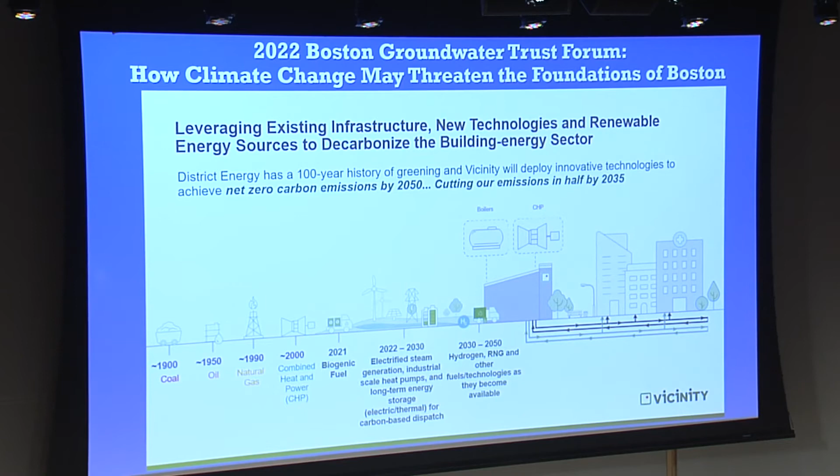And the topic of tonight's discussion is, does climate change affect groundwater levels? Of course it does. It affects every aspect of our life. So how can we address it? How can we get serious about it? How can we think outside the box in terms of how we're going to fix it? One of the things that we're going to do is leverage our district energy system.

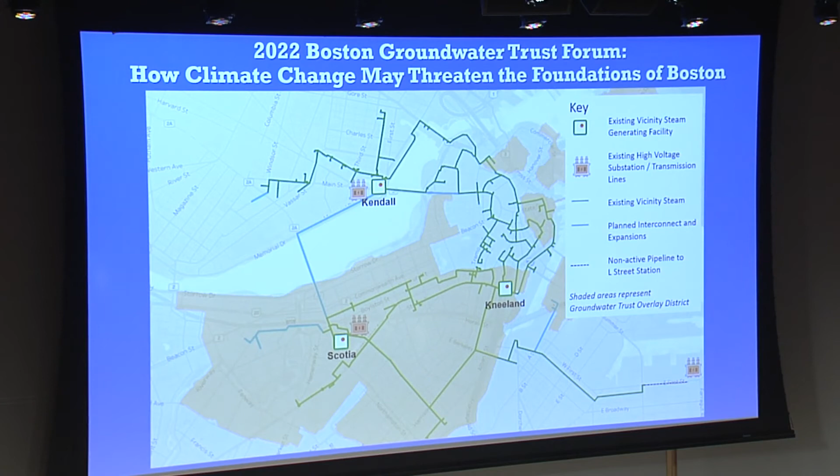This, by the way, is the system. You can see that the shaded area is the GCOD, and then the pipes are existing infrastructure, and then some new planned interconnect and expansions.

So what is the water cycle of steam? It begins as river water or from Boston Water and Sewer. We create it into steam. Then there's condensate, and then there's either plant return. Some of the condensate goes back to our plant.

Some goes into the sewer. Some we're going to put into recharge wells, which will then go into groundwater or the bay, which then river water. It's the cycle. It is the circular economy.

So what we're talking about tonight is working with the Groundwater Trust, and this is already well underway. We're working with some of the incredible folks who are committed to this as well, using some of our condensate, our steam condensate, and using that to inject into groundwater recharge wells.

Now, the beauty of this, it's the mighty hat trick in hockey. It will save our customers money. It will save us money. It will conserve water. It will help better efficiencies for our buildings, and it will also allow for that constant level that we need. We've seen some great examples.

Christian talked about, Rob talked about, our friend from Amsterdam talked about how these weather events, how some of these droughts can have a chilling impact on groundwater levels. If Massachusetts had to deal with what California did in a 20-year super drought, we would be seeing absolutely catastrophic consequences because of that.

We can help keep those water tables level. We can use our condensate as we talk about the circular economy. I just want you to think, several years from now, not too far off in the distance, we could be having a wind turbine off Boston Harbor, spinning, creating electricity that goes to our electric boiler, that creates steam, that goes and helps heat or cool one of our buildings.

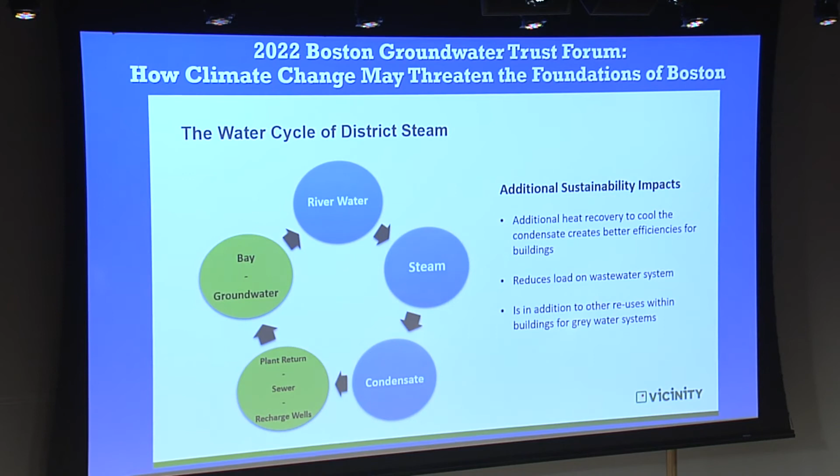We then capture some of that condensate to go inject into some of our groundwater wells to keep that water table level. It's a remarkable thing. It's the story of this city. It's the story of our company. It's the story of the Groundwater Trust. Innovative technology, or established technology, which is constantly innovating.

So we are delighted to be here and to partner with some incredible friends. Things are already happening underway. Some well-known institutional players are already beginning to see how we can make this work, but this is something that will have a profound impact, and we are so delighted to partner with the Groundwater Trust to make this a reality. It's the right thing to do for our customers, it's the right thing to do for our city, and it is the right thing to do for our planet. Thank you very much.

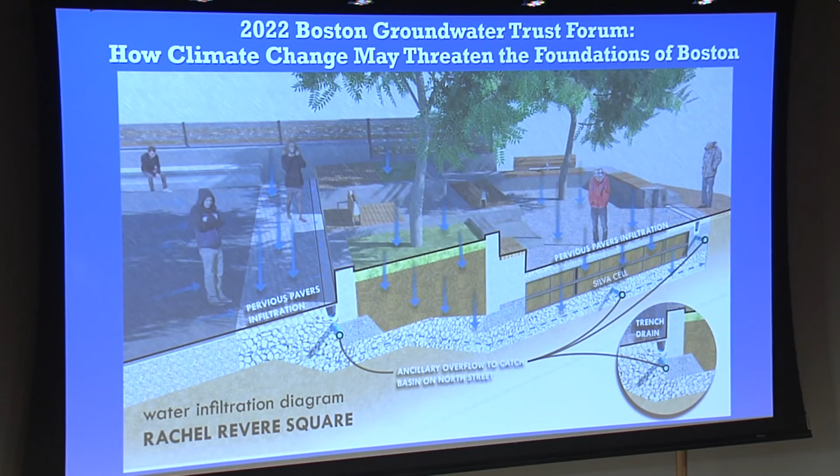Carrying around my thing.

Well, like everyone has said, good evening. I am John Sullivan. I've worked there 50 years in the water and sewer systems in the city of Boston. And I, fortunately or unfortunately, signed a new 5-year contract, so you get 5 more years of me.

2 fun facts. The biggest potential culprit to lower the groundwater in the GCOD area is the water and sewer systems serving your homes, and your home itself, which connects to our pipe, because they're all down below the groundwater. Any type of crack in that could cause the depletion of groundwater. That's fact number 1 that you may not have realized. The other fact you don't care about: I get more phone calls from Christian than I do from my wife in any given week.

So Boston Water and Sewer has been working on this issue since 1985. We first got involved with Brimmer Street, where there was a lawsuit on it. What are we going to do? We looked back in our records. We all talk about the groundwater wells - the WPA put them in the 1930s. Why did they do that? The front of this library collapsed in 1929, along with the stock market, but all by itself due to a leaky sewer in Dartmouth Street. The technology at the time was to put a dam in the sewer and simply back it up so that the water couldn't leak and the piles could remain wet. Those sewers were replaced in 1996 because we had all kinds of good technology, and we were learning. So it's been a long process, a long learning process. We worked in forming that. I survived Elliott Laffer. I'm working on trying to survive Christian, and it's coming along.

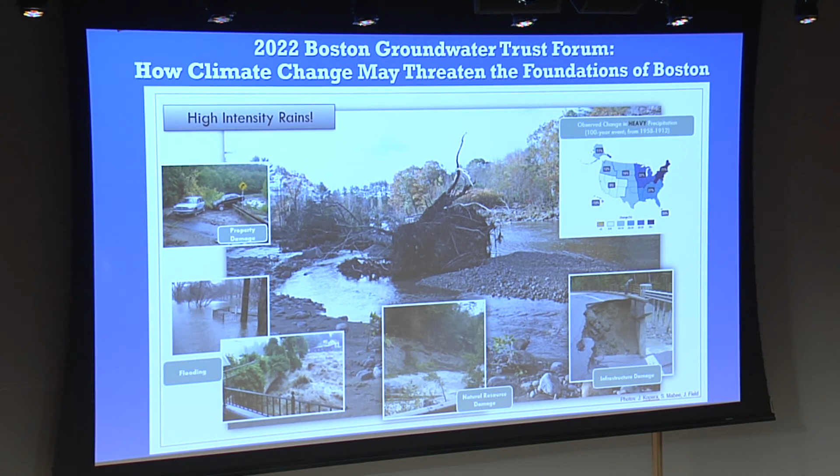So this is what we're seeing: the juxtaposition of these heavy rain events causing damage to infrastructure, natural resources, property—all sorts of flooding. At the top right, I put a map from the National Climate Assessment showing that in the past 60 or so years in New England, we've seen a 71% increase in these high-intensity heavy precipitation events.

This is just Massachusetts—I'm not even talking about the rest of New England, the country, or the world. In Massachusetts, we're seeing a lot more droughts, and droughts aren't really associated with this part of the country; we only think of the Midwest or California. But we have our own types of droughts, and it's particularly troubling in the context of climate change because of how temperatures have been trending.

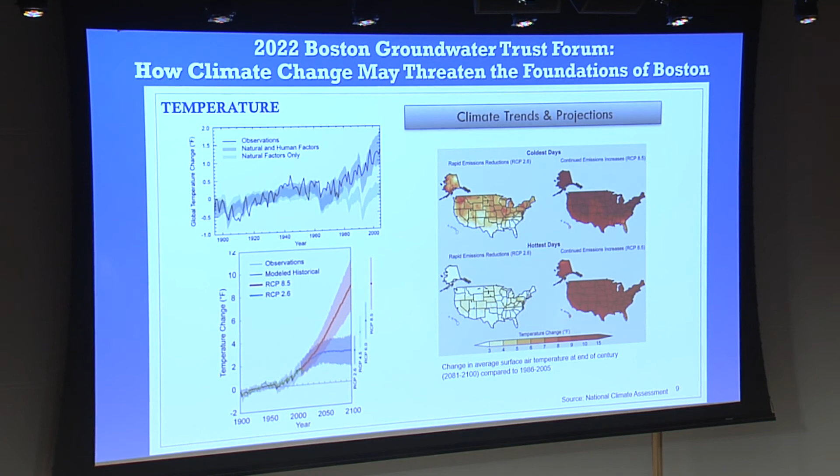Massachusetts is going to look more like North Carolina. That may suit someone like me who grew up in the tropics really well, but it has lots of other impacts for so many other aspects of our life here in Massachusetts that we've gotten accustomed to. So I try not to put too many numbers on a slide, but this particular one was very telling for us.

Since 2016, what's been troubling is how groundwater and stream flow have fared in our region. We've received some years of below normal rainfall. In 2016, the average was 37 inches. In 2017, it was 47 inches, and our average each year is about 48 inches. That's what Massachusetts gets, so we do see some years with below normal rainfall.

But our stream flows and groundwater have seen record lows. And when I say record lows, it's comparing what it is at that point in time with how it's ever been at that period for all years in the past that we've had records. In Massachusetts, we've been blessed with records going back to the late 1800s, so we have 100, 120, 130, 140 years of record in some cases. And we're seeing the worst, the lowest levels now.

So what's going on? Why? The precipitation is not that low, so there's something that's off. There's something that's just not quite right in the way water is moving through our system that is causing these record lows in our streams as well as in our groundwater.

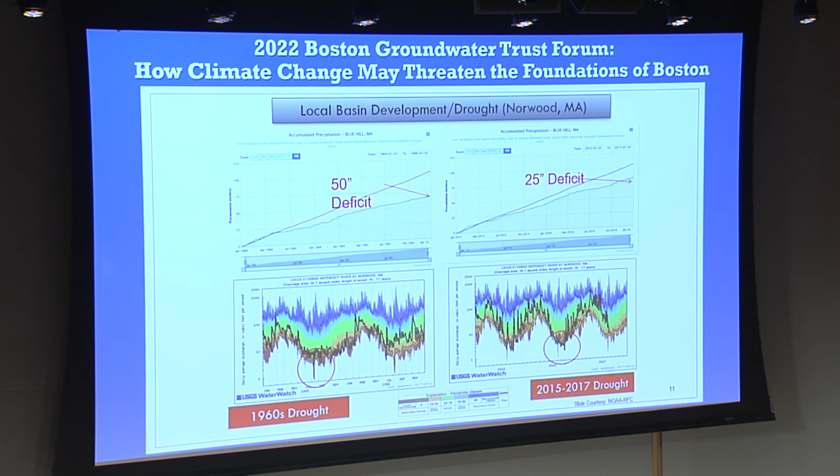So something's happening. Something has happened between the 1960s and now that has changed this. Two guesses, one guess: development, impervious cover, lack of recharge. And therein we come back full circle to how the lack of recharge in the city of Boston for sure, but also other parts of Massachusetts, is really creating havoc on so many different systems.

So I just have some quick takeaways. Precipitation is changing, we're getting more hot days. There are a lot more short-term droughts, as we're already seeing. In the last 7 years, between 2016 and now, 5 of those years have seen drought for at least 5 months of the year. That's unprecedented for Massachusetts.

And we're seeing what's called flash droughts, where this high temperature we're seeing is interacting with the precipitation and exacerbating the drought that we already have. It's intensifying it, making it come quicker, move quicker, and last longer. And we're seeing these record low stream flows.

So what we really need to do is think hard about how we're developing. What are we doing with our impervious cover? It's all about when we talk in political circles, oh, we need to grow, the economy needs to grow. We can, but let's do it in a way that is not messing with this basic hydrological system that we've benefited from for centuries.

So the bottom line is land use really does matter. It matters where we develop, how we develop, and what we're doing with our open space, our natural recharge areas, our green infrastructure - where and how we develop really matters. So I'll stop right there.